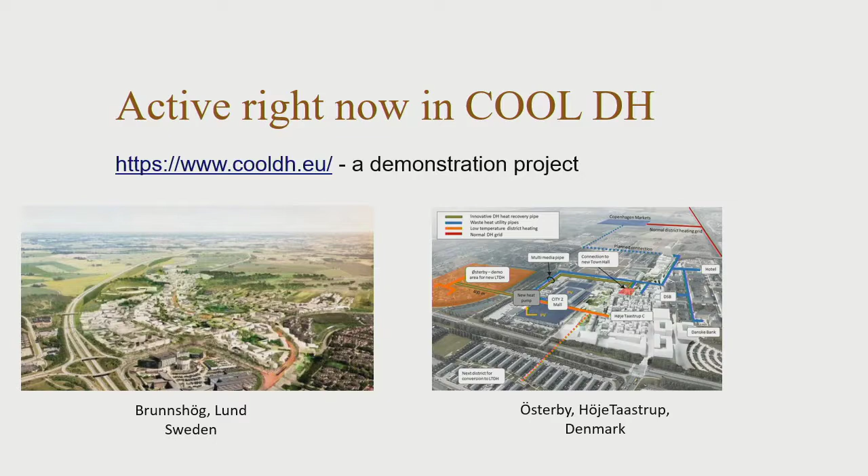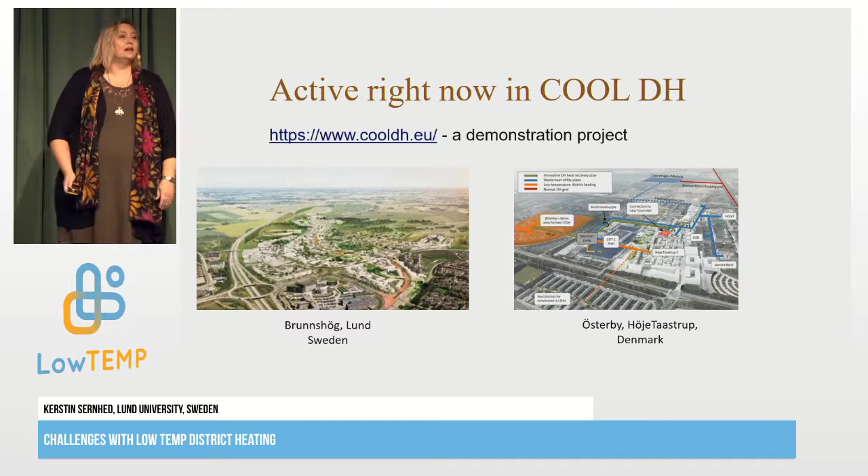So we are part of the CoolDH project, and it's a demonstration project where you apply low temperature district heating in 2 areas, one in Lund in Sweden and one in Denmark. We will hear about this later. Reto will tell you about Denmark, and Sara Mark from Kraftringen will tell you about the Swedish side. So I won't dwell about this.

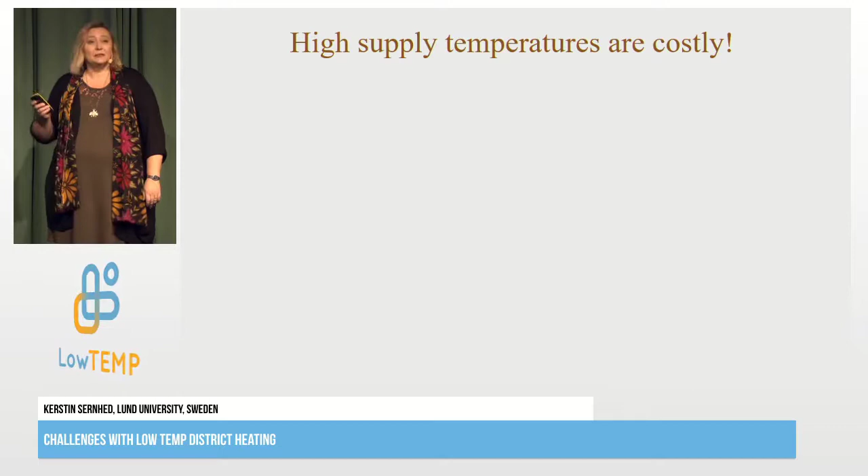Well, I want to start with this: high supply temperatures are costly. Sven was talking about this, but I want to show you a study which really showed this. This was from Lisa Brange, and she worked with bottlenecks in the grid. A bottleneck is where you have a pipe with a too small diameter for the flow that is needed to supply the customers beyond the pipe. She worked with different measures on how you can deal with these bottlenecks.

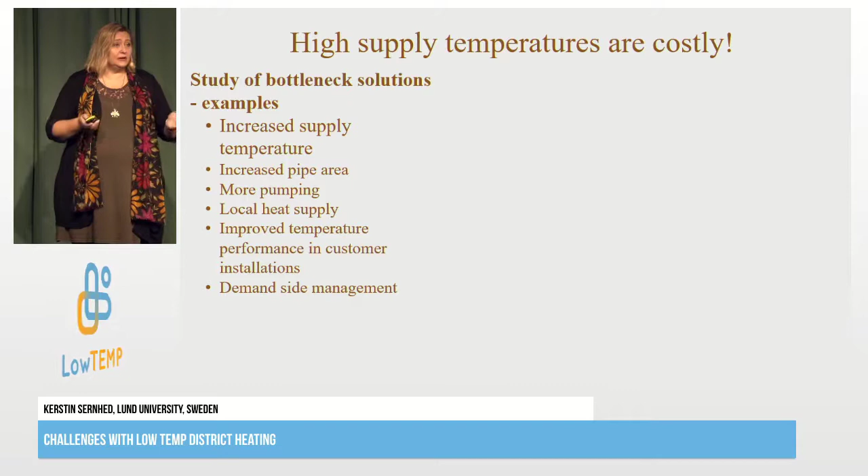You can see increased supply temperature is one measure - that's one thing we don't want to work so much with in low temperature district heating. Increased pipe area, of course - we have to have more flow to get the same amount of energy. More pumping. Local heat supply could be a solution for the bottleneck. And what Sven was talking about, we really, really need to work with the substations and with the customer installations

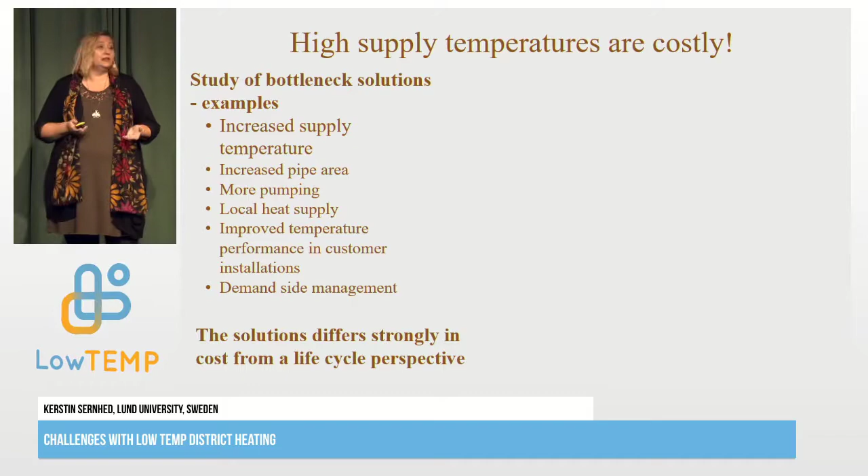in the houses, and also the usage pattern, so we can work with demand management. These solutions really differ when it comes to costs from a life cycle perspective. Lisa was doing her work in the Eon grid here in Malmö. It was a real grid, but it was a fictive area she looked at. She used NetSim for simulations, and she used interviewing staff about costs.

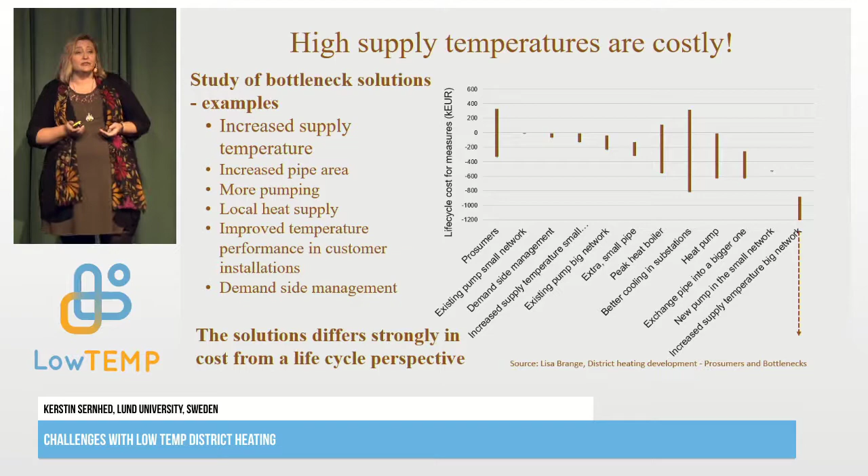So I will show you. She had more measures than I told you before, but I want you to look at this. It's a range because it depends - it's always when you ask about cost, it depends on the grid, and it depends on the residues. But if you look at this arrow here, increased supply temperature, big network, it's actually going down to the floor, down to, I think it was 11,000 kilo euros it could cost to raise the supply temperature. Now, it was said that you should use this method for 1 month, just to be able to compare this, but still you see, this is really, really costly.

And it depends what we have for production and heat losses in the grid, of course. It depends, but it's really huge. For low temperature district heating, we can't use this raising the supply temperature so much, because maybe we will build with plastic pipes, and it can't take the heat, and we will use surplus heat at lower temperatures. So we don't have that means to work with the bottlenecks, which means we have to work with all the other ones much, much more.

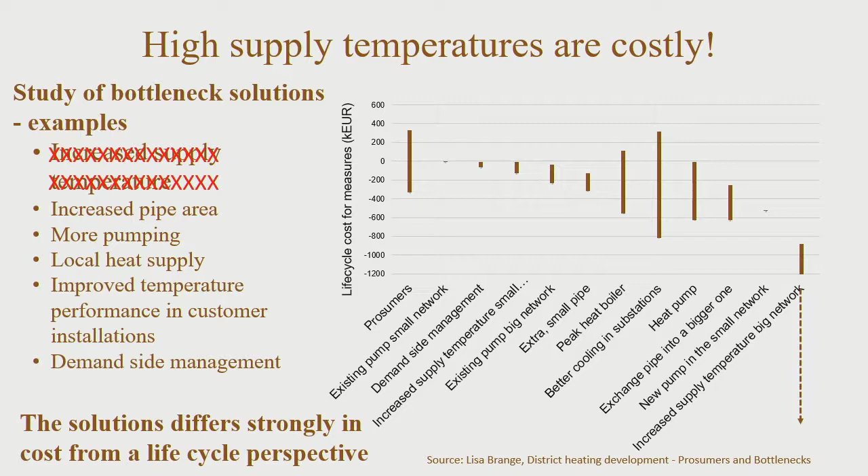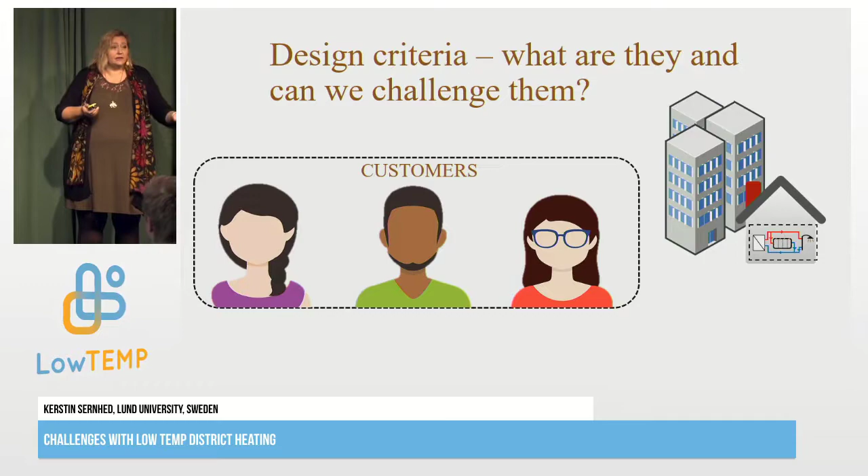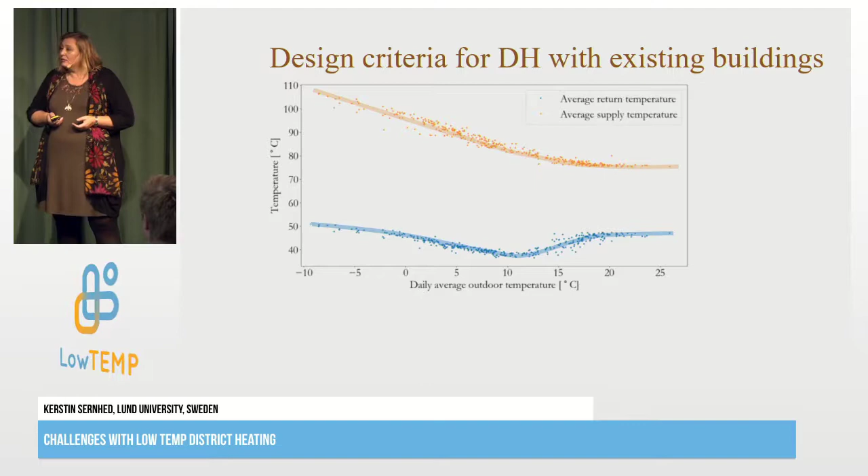So I want to say something about the design criteria. Sven was into that - I mean, design criteria for district heating is we will provide the customers with heat. So it's the customers, their buildings, and it's their heating systems, and their usage patterns, of course. So in existing buildings, here we have the background, which is just the average return temperature and average supply temperature in Europe. You would say maybe it's a little bit high, but it doesn't matter.

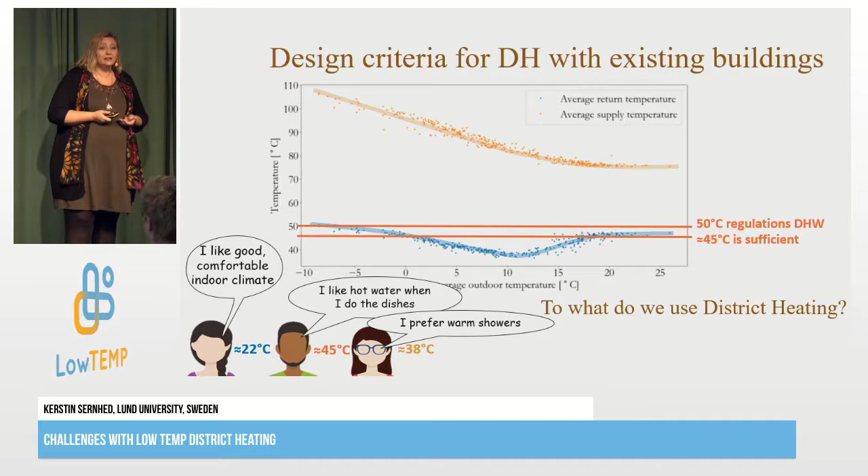But, of course, we have some problems with Legionella. Legionella is a bacteria that can cause Legionella pneumonia, a kind of lung disease, by aerosols. The hot water regulations say about 50 - in Sweden it says 50. And as Sven said, in Sweden there are a lot of heating systems that are designed for 60 degrees.

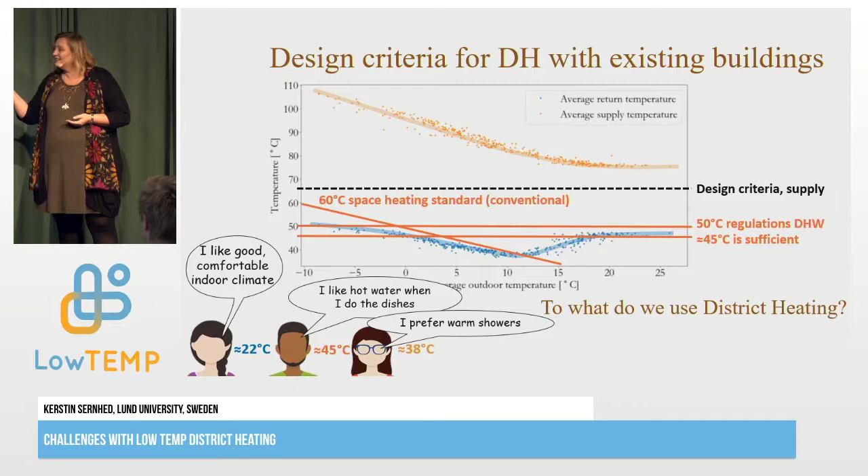In wintertime we actually have to have higher supply temperature in order to suffice the customers. So this is for existing buildings, and it's exactly what you said, Sven. We could go down here if we don't have the faults, and we could save a lot if we do that.

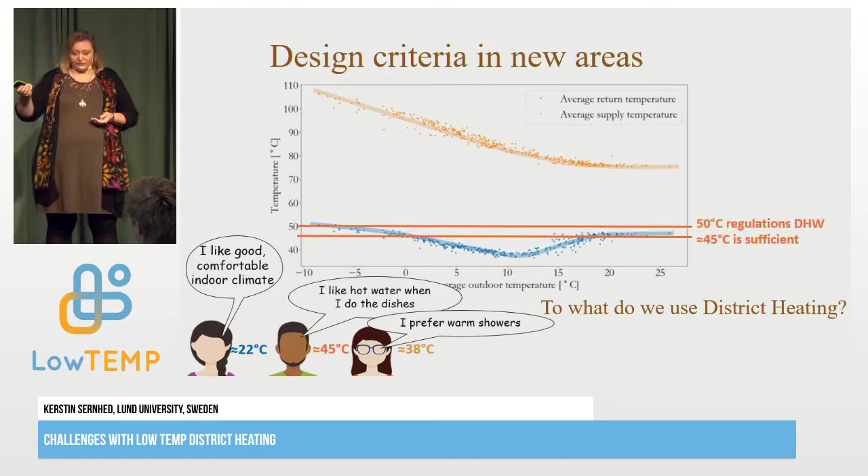Well, for the new areas, we have the same customers, they have the same needs. 45 degrees is sufficient, 50 degrees for the Legionella. But for the heating, space heating, we could suffice with 28 degrees for the customers.

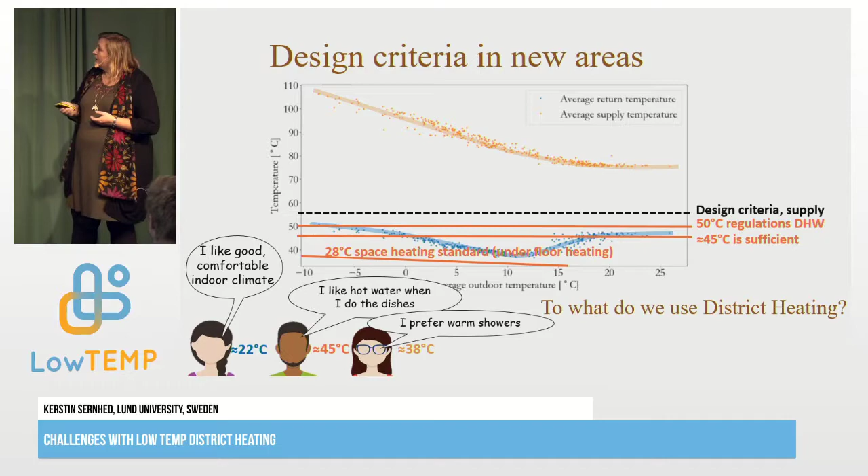So here it's really the domestic hot water that sets the limit. And of course, you don't have to supply 55 degrees at the customers if the customers can heat it up themselves. You could use electricity for that. But then it's a question, do we want more installations? Do we want more electricity in the system? So, of course, the potential is bigger here.

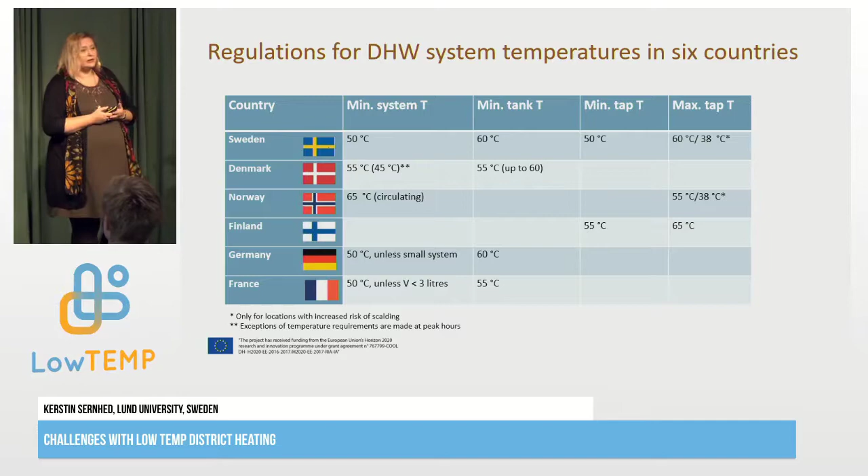In CoolDH, we did a pre-study about domestic hot water regulations, and you can see it's six countries, and it differs actually. You see that it differs on where they can have it in the system, at the tap, in the tank, in the circulating water.

What you can see is that Sweden has 50 degrees at the tap. Denmark has higher, but they can allow lower if it's peak hours. Norway is really high, so the design criteria will go up yet more in Norway.

Germany and France have something called the 3-liter rule for small systems. So when you have a heat exchanger and a pipe to the tap, and it's just 3 liters in volume, you don't have to apply the 50-degree rule. It's like you have a villa. It's the same, but you see, it differs.

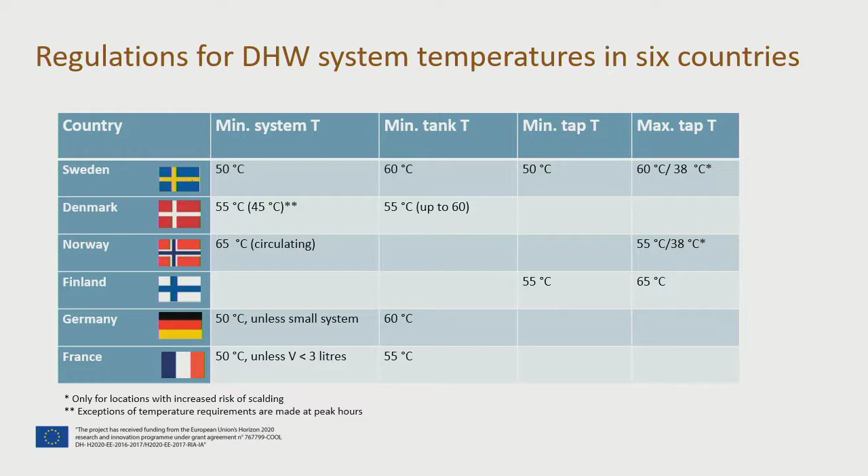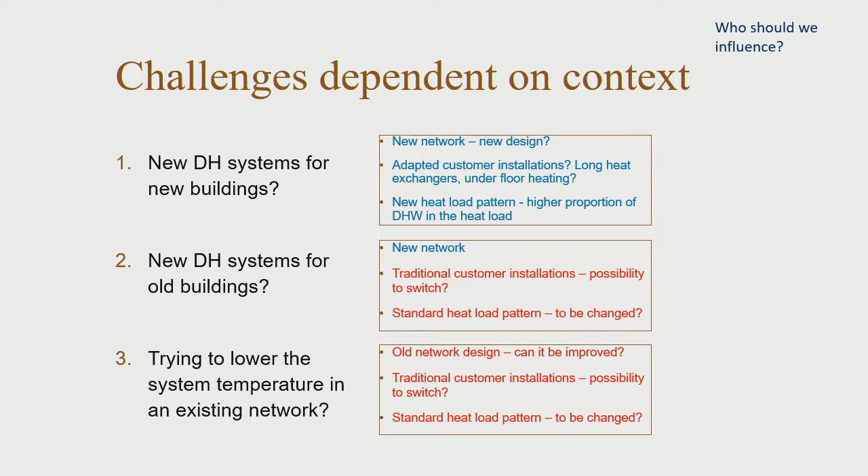And maybe we should do something about that. So actually, we will have different challenges for different situations. Do we have a new grid with new buildings, new low-energy buildings? Do we have old buildings with a new grid, or do we have an old grid with old buildings? And this will affect who you want to influence.

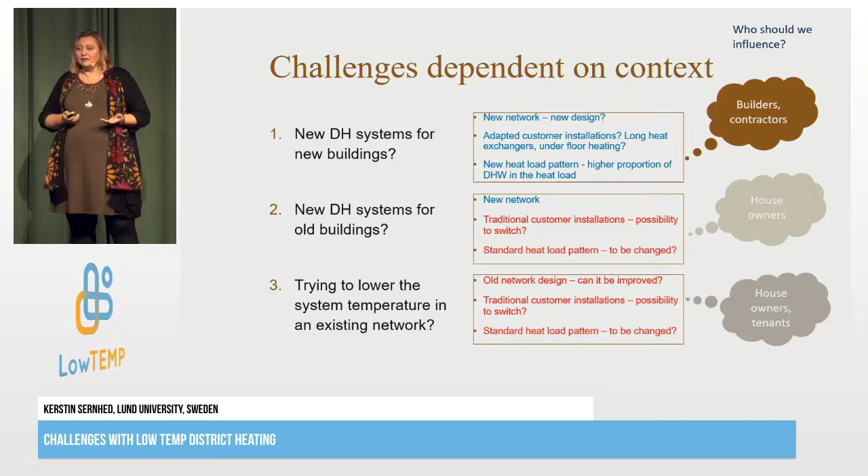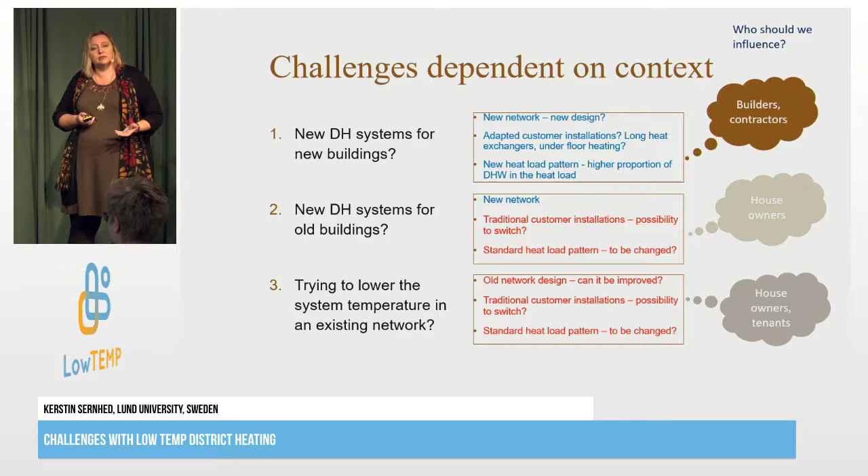I think this is the key. The key challenge here is not the technical things, it's how we work with people, how we work with the contractors, how we work with the customers, to be able to do this in the whole system. Otherwise, we can't reach this.

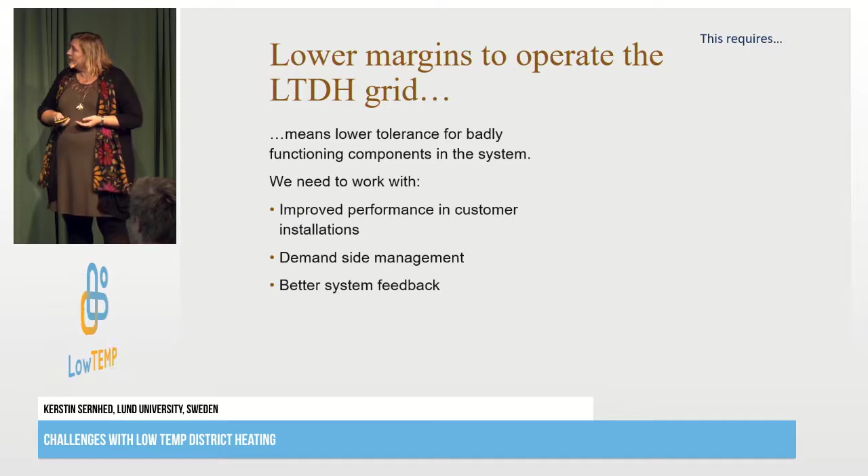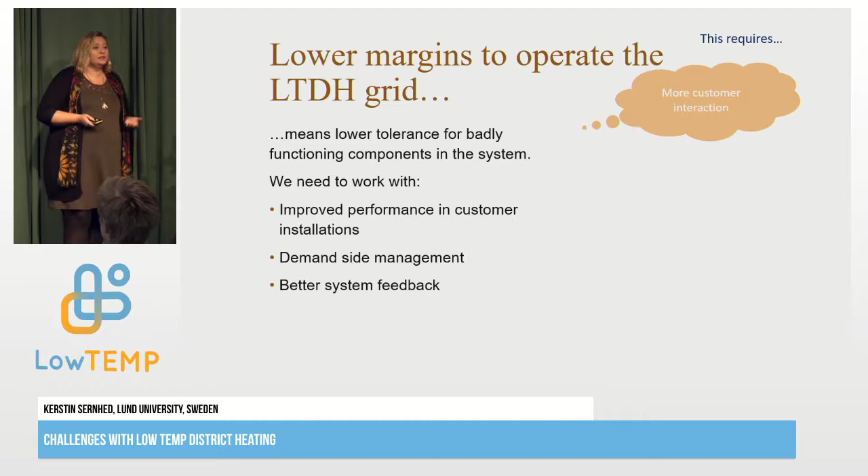In the low temperature district heating grid, we will have lower margins to work with. We can't raise the supply temperature, as I said. So we really have to work with all this. It will mean that we would have more customer interaction for fault detection, for demand-side management, for trying to get the customers to use the energy as efficiently as possible.

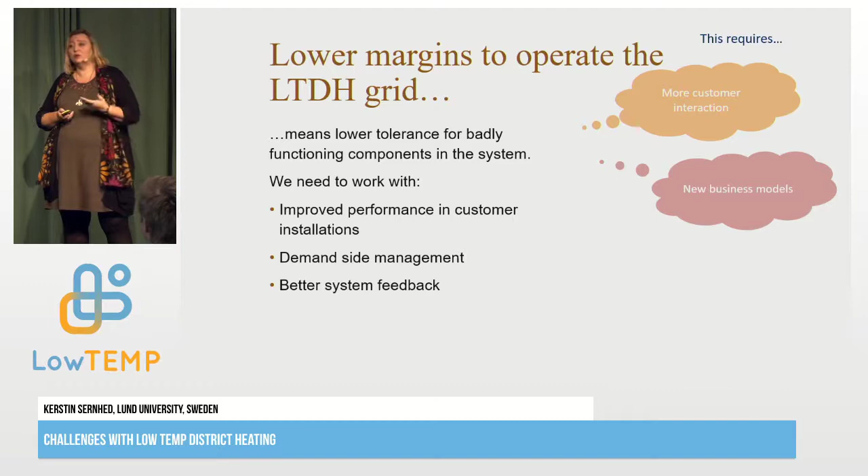It would mean that we have to make new business models, maybe new price models, maybe new services. Who should own the district heating substation? And can we actually make demands on the customers? Can we say that the customers should have this return temperature?

Today we just let the customer do whatever it wants. Maybe we have a price model. And it actually means that we have to have a new type of organization in our district heating companies, able to deal with these new services and new businesses.

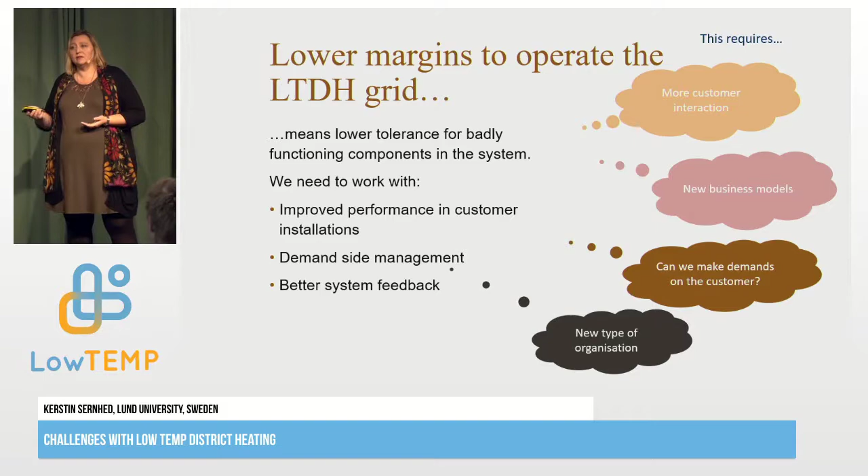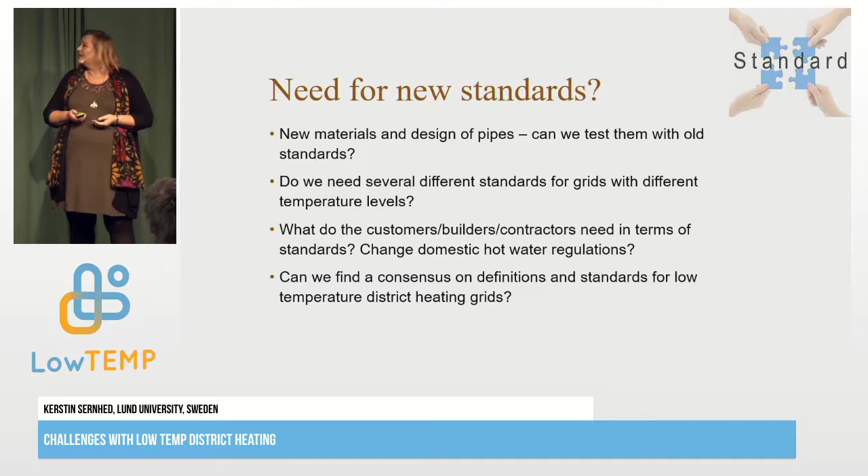Søren was also saying something about standards. You can hear Klaus Lauritsen from Logstor - he has been working with plastic pipes for CoolDH. He can tell you about the challenges about standards later on. And we really need standards because we need the customers, the contractors to know what to expect.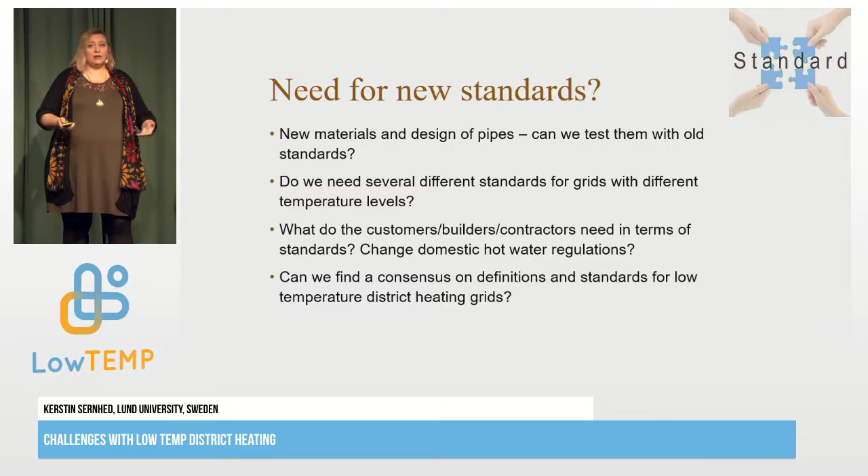And maybe we need different standards, and maybe we need to know what are we talking about - low temperature district heating.

So the conclusion is lower operation margins makes us have to work with the customer side much more. And we have domestic hot water regulations that maybe need to be changed. Maybe we can solve Legionella with technical solutions - chlorinization, ionization, filters. Maybe. And we have to challenge the old ways.

So it's actually the people, I think. We can do all the engineer solutions, but we have to get to the people.

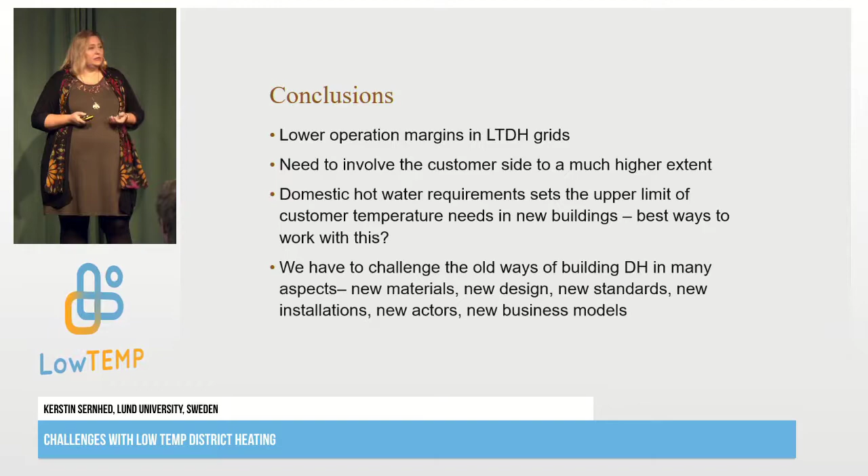Sure. Well, great. Yes, we have a question there. Hi, Helle from Holbæk Municipality.

I just have a question about the Legionella, which you say is a problem, but I have heard that in district heating it shouldn't be a problem because you have flowing water, and it's only a problem if you have still water for a long time. If you have continuous flow, then Legionella should not be a problem in low temperature district heating.

Well, that is correct. If you have heat exchangers at every apartment, then you will have the same solution as in today's villas. So yes, but usually in Sweden and in Denmark and other places we don't have heat exchangers at every apartment, and that's costly to install as well.

Okay, so there's a difference if it's a one house area or an apartment building area. You can say you have maybe a substation in the basement, and then for all apartments, maybe if you have a supply temperature of 40 degrees - we don't know if that's sufficient still - but 50 degrees maybe yes.